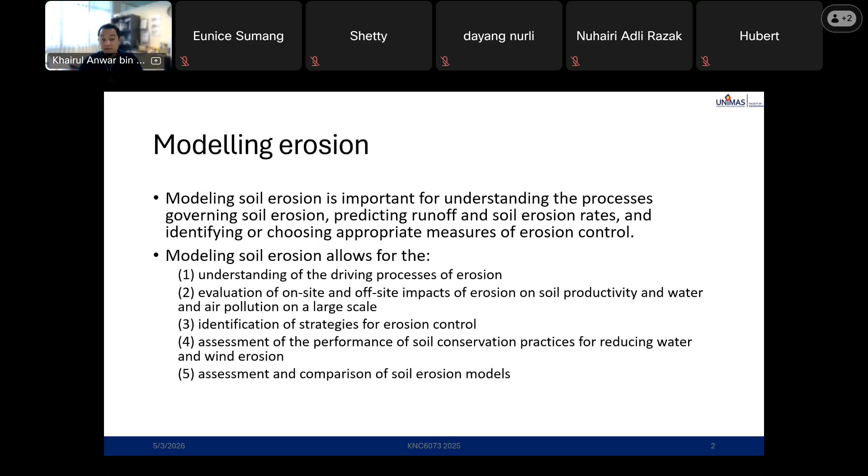As I said, there are a few models to be used. However, there's a limitation for the model as well as its benefit. So no model can completely replicate field observation. A model can, however, provide valuable information on soil erosion trends and relative differences in erosion rate among different practices, while allowing exploration and understanding of the driving processes of the soil erosion.

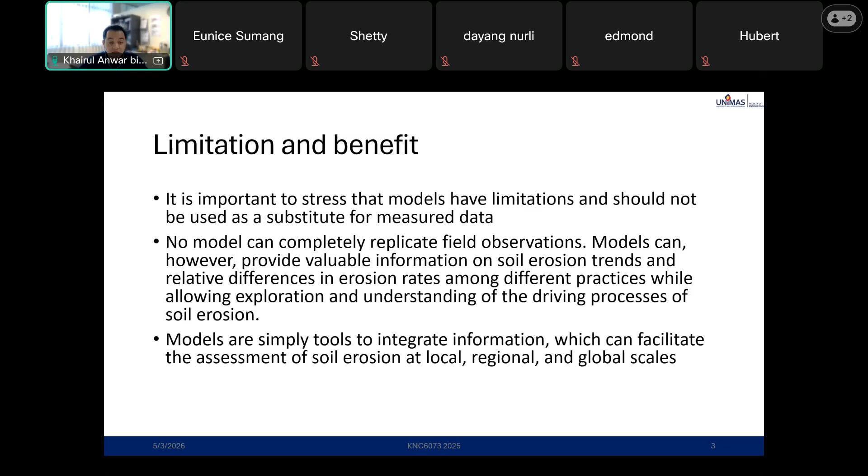Empirical model. So many empirical models have been developed since 1900. So the first one is equation 3.1, equal to C prime times L to the 0.6 times S to the 0.4.

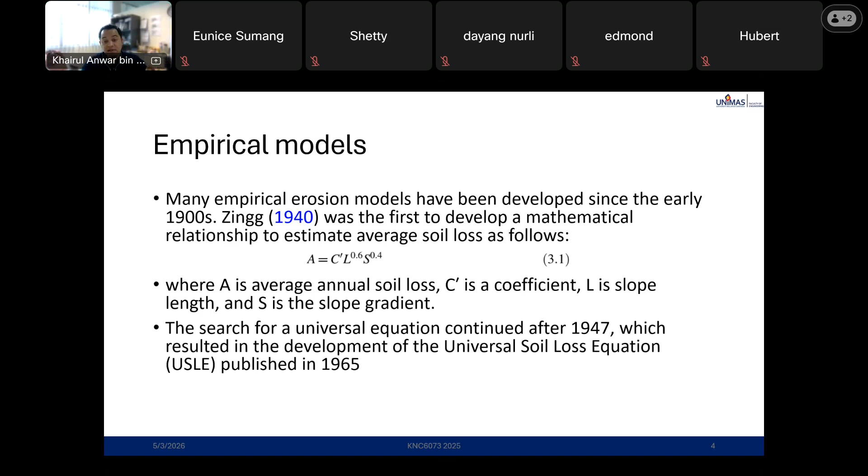Even the equation USLE 1965 has had improvements from it. We have a modified USLE, or MUSLE. We have a revised USLE, or RUSLE 1 and 2. So it's evolving.

So the average annual soil loss in USLE 1965 is equal to R times K times LS times C times P. A is the average soil loss in megagram-ton per hectare. R is rainfall and runoff erosivity index, EI, for the location of interest. Later we discuss each of these variables.

Then K is the erodibility factor, LS is the topographic factor, C is the cover and management factor, P is the support practice factor. So the early versions of USLE were exclusively solved using tables and figures. Continued improvement has resulted in the modified and revised USLE.

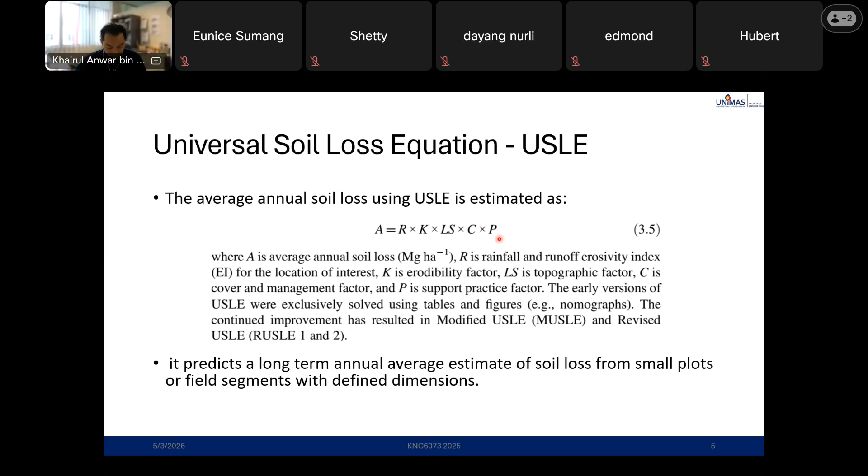So there's a limitation to USLE 1965. That's why there are some modifications and revisions to the original 1965 equation.

So USLE, unlike process-based models, cannot simulate the following: runoff, nutrient, and soil loss from watershed or field scale area; soil loss on an event or daily basis; variability of soil loss from storm to storm; interrill, rill, and stream bank erosion separately; process of concentrated flow, flow channelization, and sediment deposition; and detailed processes like detachment, transport, and deposition.

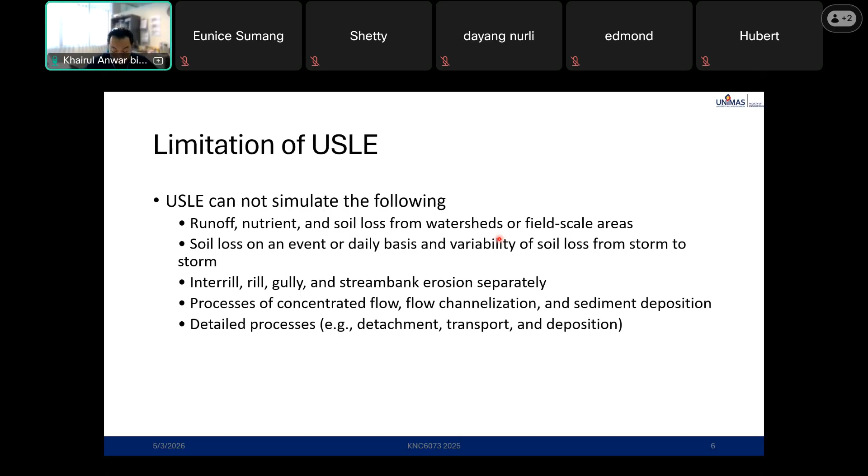So R, the first letter in the USLE, is the rainfall and runoff erosivity index.

The EI, which is the same as R in equation 3.5, is computed as the product of total storm energy times the maximum 30-minute intensity of the rain. So EI equals E multiply I, where E is D as in equation 3.7. D is the rainfall depth, I is the 30-minute rain intensity.

So USLE uses the annual EI, which is computed by adding the EI values from the individual storms that occurred during the year.

So there are some limitations for the USLE-computed EI here, in equations 3.6 and 3.7. It is only valid for rain intensity less than 63.5 millimeter per hour.

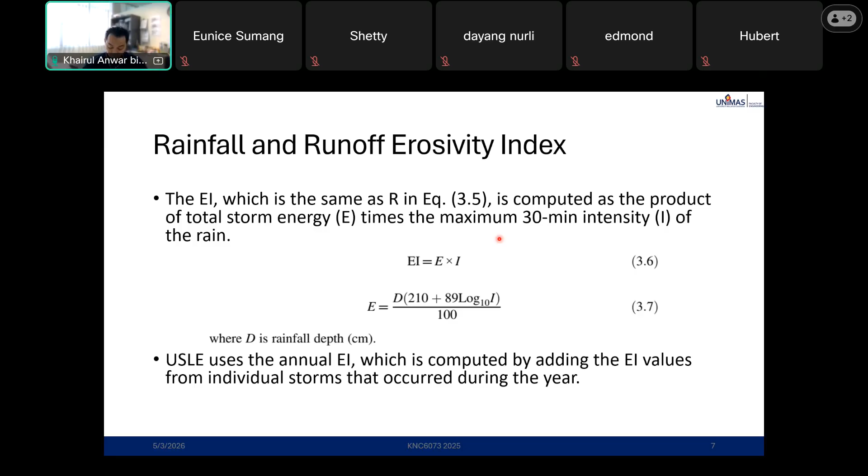So this is the map of runoff erosivity index, or R. Data on R for different locations in the continental USA, and estimates for the world, are available. In the US, about 4,000 sites were analyzed for rainfall intensity over a range of return periods to develop an isoerodent map, figure 3.1. Values of EI30 below 500 correspond to dry regions, and 500 and above correspond to humid regions.

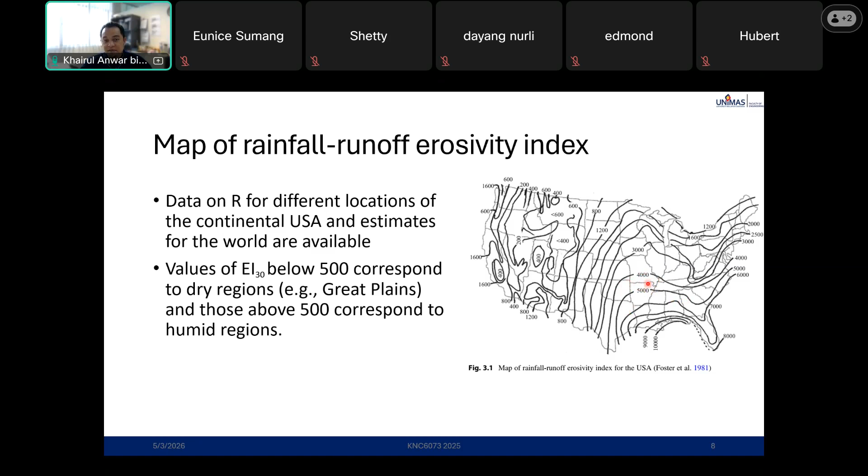So for this, how do you use this map? Let's say the location is limited to the US where the data is available. For example, if you want to identify the R index for a certain point, how much is it? Here, it's between 4,000 and 5,000, so you can estimate how much R is there. For 4,000, this is the humid region. They also have a soil erodibility factor.

So the soil erodibility factor refers to the soil's susceptibility to erosion.

So the K values for the development of USLE were obtained by direct measurement of soil erosion from fallow and row crop plots across a number of sites in the USA, primarily under simulated rainfall.

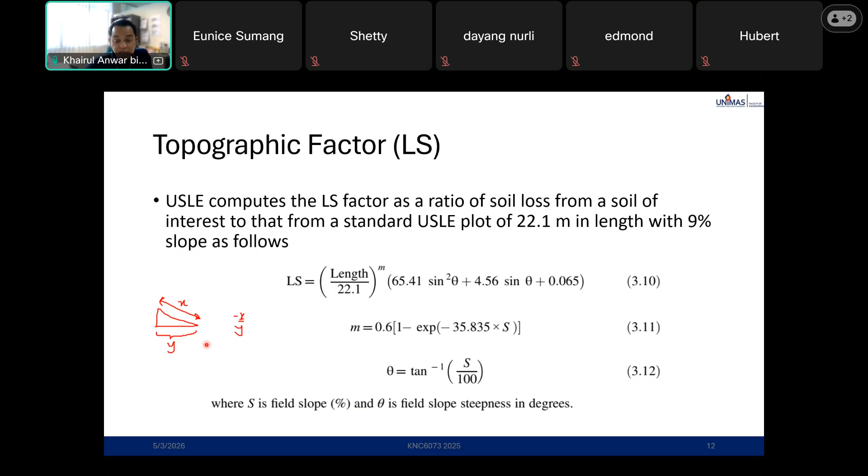How does the steepness calculate? It's based on the length of y and x. When it's downhill, down slope, x is negative. Later there will be an example.

Cover management factor, this depends on table 3.1. The C factor is based on the concept that soil loss changes in response to the vegetative cover, crop cover during the first stage period, rough fallow, seedling establishment, growing, maturing crop, and residue or stubble. It's computed as the soil loss ratio on a field under a given crop stage. The C factor varies with subfactors such as canopy cover and amount of residue left on the surface.

This is table 3.1. You need to remember the USLE equation has a few indexes: R, K, LS, and C. How to use it depends on the description of the land or soil. Let's say the soil is for corn plantation.

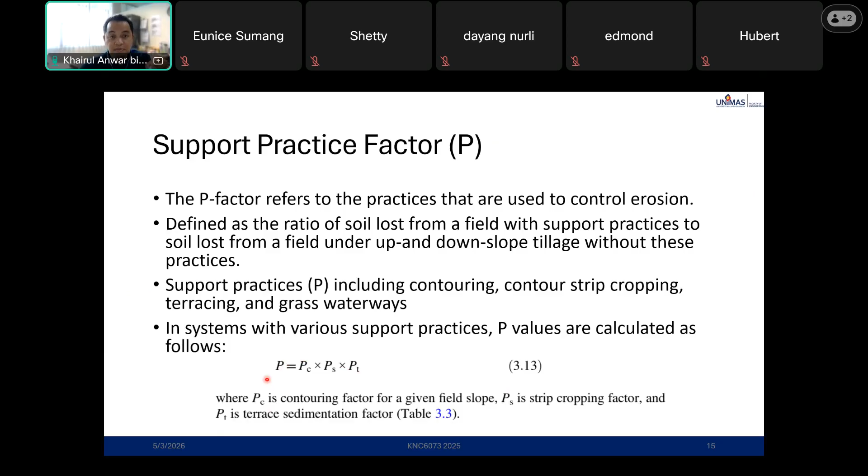In systems with various support practices, P values are calculated as follows in equation 3.13, where PC is the contouring factor for a given field slope, PS is the strip cropping factor, and PT is the terrace sedimentation factor. This is in table 3.2 and 3.3. You need to identify PC, PS, and PT, and put them together to get the value for P, the support practice factor.

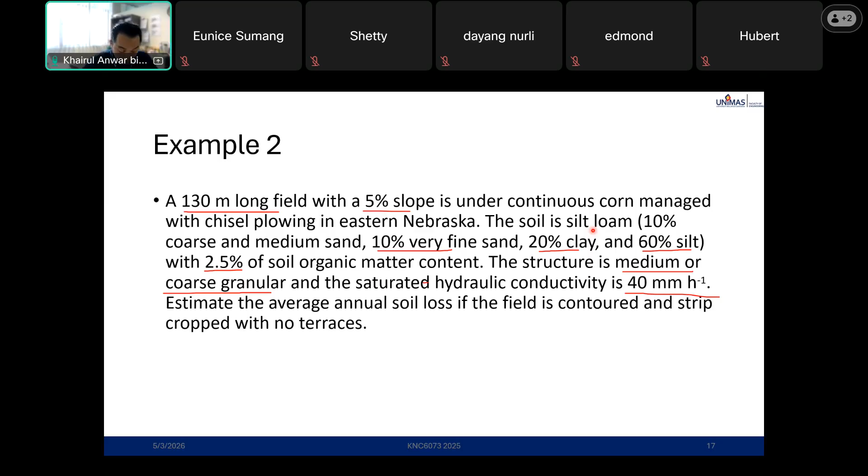R is 2,500. Next is the value of K. K depends on equation 3.8, where there's a value for A, B, C, and M based on the description given in the question.

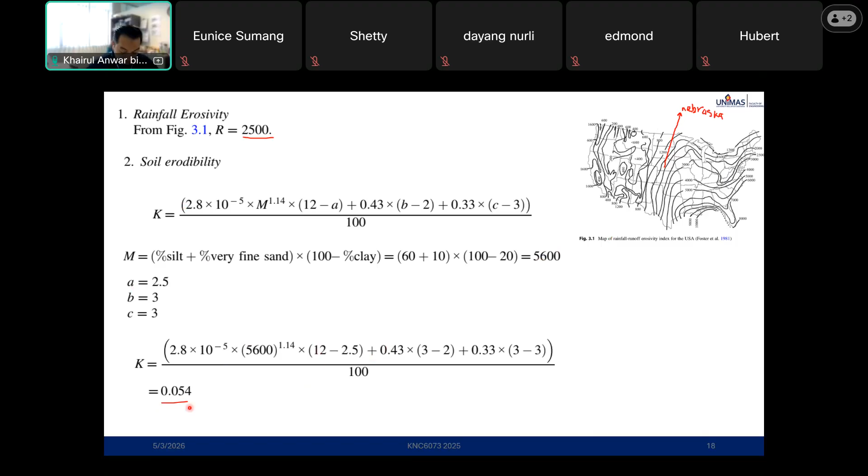Next is topographic, so LS.

So for topographic factor, S is the percentage of slope. In this case, slope is 5%. So 5 divided by 100 is 0.05.

Then we have theta. We need to determine S, then we can get theta. So once you get M and theta, you just plug them into the equation.

3.10. So the length is given in the question, which is 130 meter long slope. So this is 130 meters to the power of M. M here is 0.499. Then since theta, plug in, we will get LS equal to 1.106.

Next is the C value, the cover management factor. For value of C, you need to refer to table 3.1, page 59. Based on the description, this is a continuous corn managed with chisel plowing. So the value of C is 0.2.

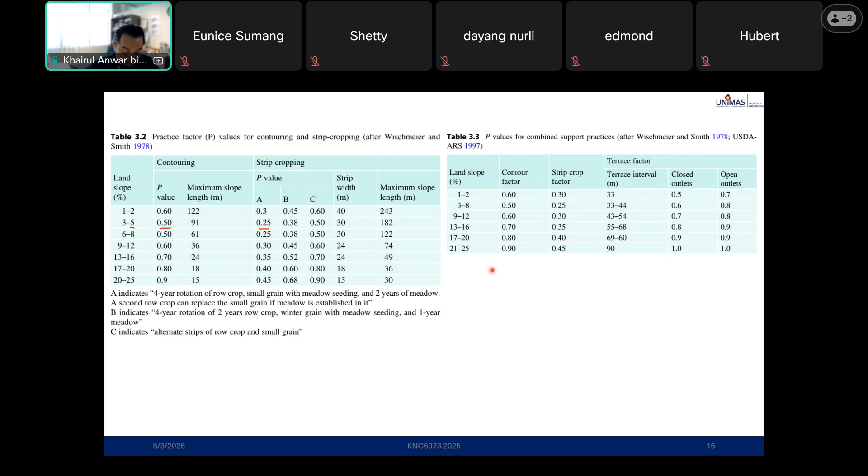And for PT, oh, there's no terrace. So with no terrace, P is not equal to 0, it's equal to 1; equal to 0 means P equal to 0. So PC is 0.5, PS is 0.25, PT is 1, because there's no terrace. Once you determine all the factors or values for the unknown variables, then we can calculate the value of A.

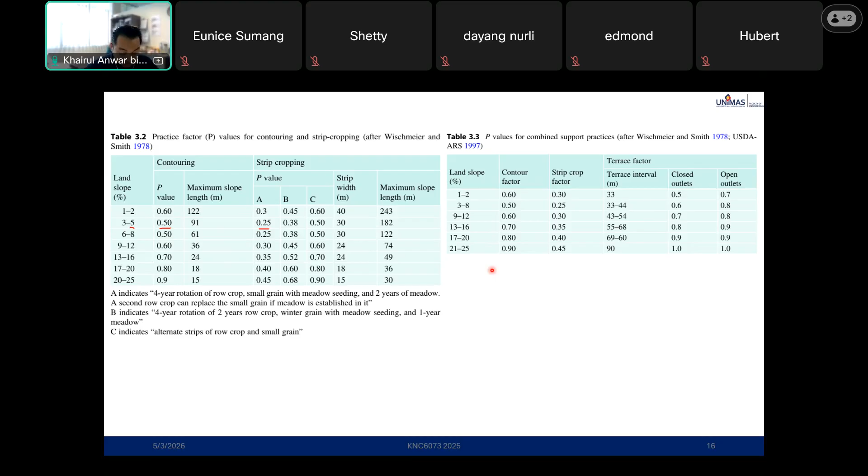Then once you determine all the index factors or values for the unknown variables, we can calculate the value of A. In this case, A is equal to 3.73.

Another question: estimate the soil loss if the crop field had been managed without contouring and strip cropping. So under this new condition, the P value would be equal to 1.

So what is A equal to? Estimate the soil loss if the crop field had been managed without contouring and strip cropping. So meaning, no terrace, no contouring, no strip cropping. So all PC, PT, PS are equal to 1. That's why P is equal to 1.

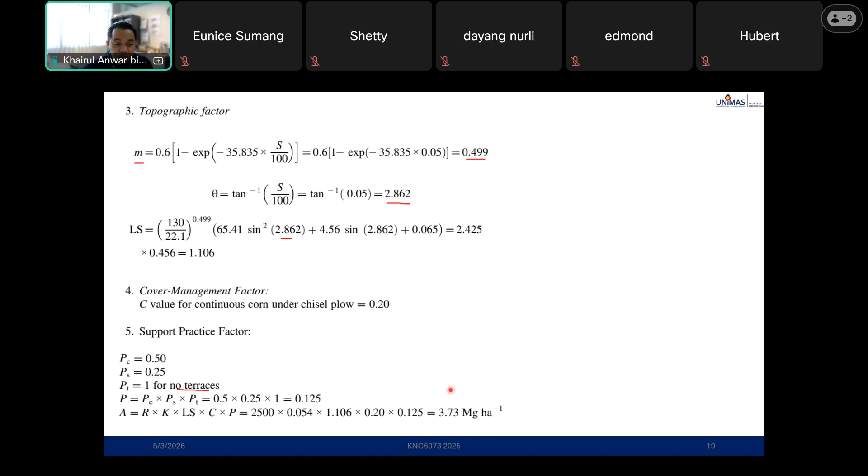So the soil loss is a lot, like a lot. With the support factor, you might lose 3 tons per hectare per year. This is annual soil loss. Then without the support factor, the loss is 29 tons per hectare per year. That one is a lot.

So this is the model. From the modeling, we can see this area, we can do the calculation and estimate how much soil will be lost in a year. So if we put support to this area, like contouring or terracing, we can reduce this soil loss up to this level. That is why we do the modeling.

Modified USLE. The MUSLE is a modified form of USLE. While USLE predicts sediment yield or soil loss based on rainfall, MUSLE predicts it by using the runoff factor, which accounts for the antecedent soil water content.

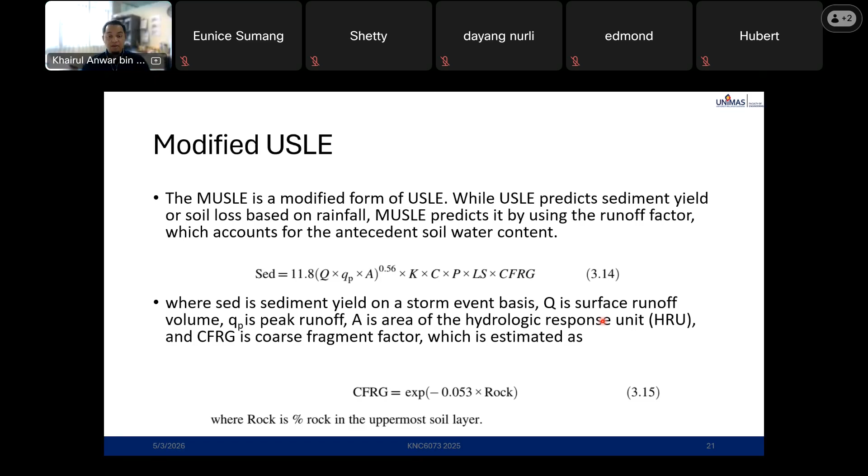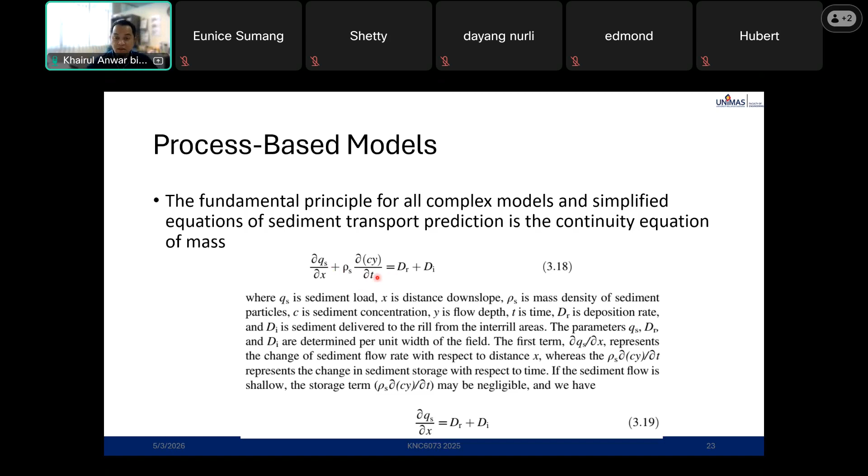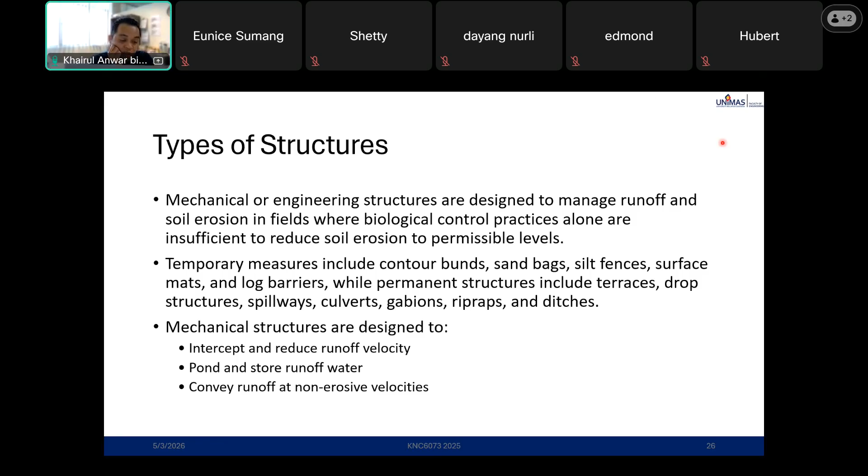So mechanical structures are designed for many purposes, meaning it's important. Some are to intercept and reduce runoff velocity, pond and store runoff water, and convey runoff at non-erosive velocity below. Contour bunding consists of establishing earth or stone embankments 1 to 2 meters wide on the field contour to reduce the runoff velocity.

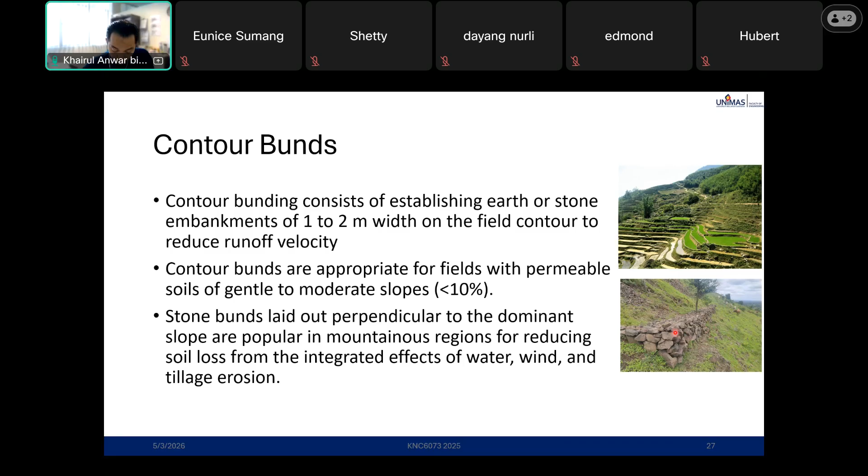All of the examples indicate that if we put some support factor on the slope, it will reduce the amount of soil loss.

Then silt fence - a barrier consisting of woven and non-woven geotextile fabric product anchored to vertical metal or wooden posts, which are arranged on the contour across the slope for reducing runoff velocity and filtering sediments.

It's like this - this is the silt fence. But silt fence is considered a temporary measure, unlike the permanent structure like this contour bund.

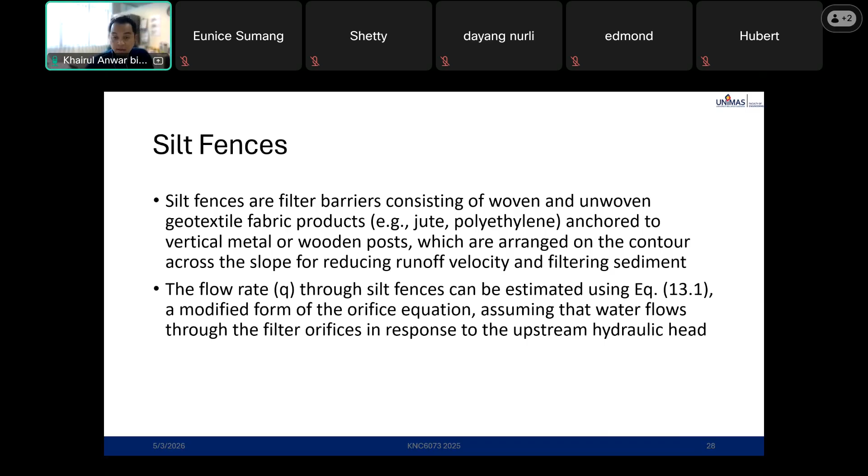So for some calculation, the flow rate through the silt fence can be estimated by equation 13.1 or 13.2, where C is the coefficient of discharge. When you see this word coefficient, it most likely means it's an empirical model. A is the area of the orifice.

g is the acceleration due to gravity, h is the depth of ponded water upslope of the fence, m is the number of openings, and dl is the opening size in the horizontal direction.

So there's an expression here - this symbol equals equation 13 point something. What is i? Without... n is the total number of openings occurring in the vertical direction. So i equals 1. How many number of openings? That is n.

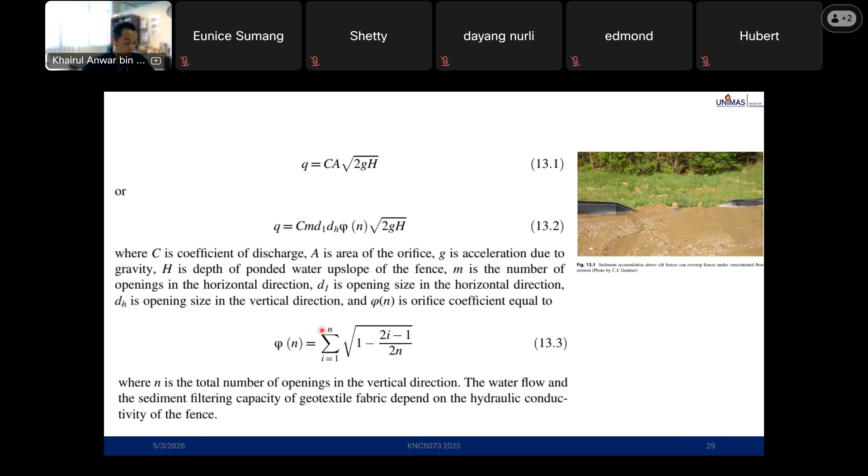Agriculture uses more than 70% of the world's freshwater for irrigation, which is true. However, availability of freshwater is declining due to intensive agriculture, increase in urbanization, and other uses of water resources. Farm ponds are structures designed to harvest water while controlling water erosion and flood.

There are four types of ponds: groundwater fed pond, stream or spring fed pond, upstream pond fed with diverted water, and rain-fed pond.

The groundwater fed pond, also called the dugout pond, relies on a shallow water table and is constructed in low-lying areas with slope less than 5%, where the prevailing water table is near the soil surface, about 1 meter. These ponds are relatively inexpensive to build. Collecting groundwater in a pond may also help lower the water table in poorly drained soil.

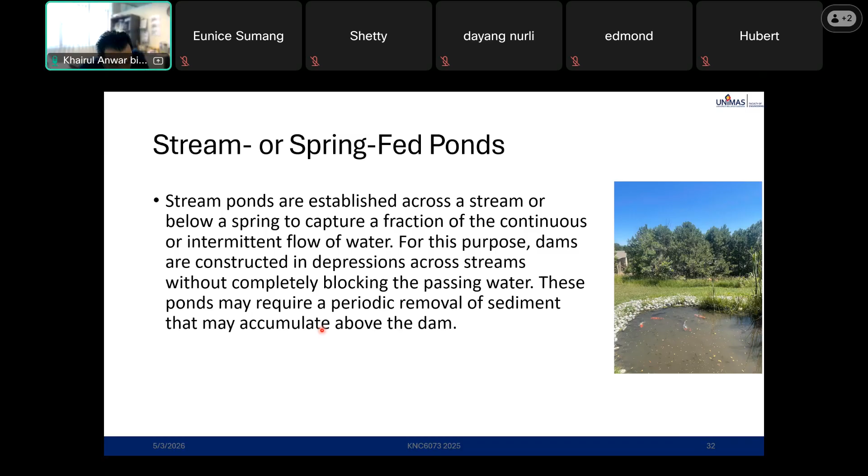Then we have upstream pond and rain-fed pond. Rain-fed pond is the most common type of pond in water-limited regions. The source of water for a rain-fed pond is surface runoff.

These ponds are installed later. There's a design on how to design a pond - how big the pond needs to be to get a certain amount of usage.

Design and installation of pond: proper design of a pond is important to reduce runoff, store water, reduce water losses to seepage and overflow, and allow water availability for growth. A suitable site should be selected based on rainfall pattern, soil hydrology, land use, and topographic features.

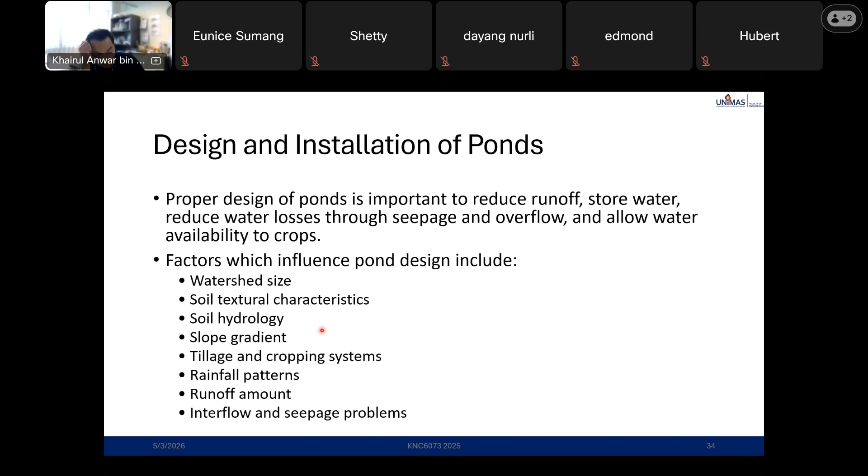Water seepage is a major source of water loss from a pond. Compaction, water seepage means it seeps into the soil itself. So compaction and lining with impermeable materials such as clay or plastic sheeting are the strategies to reduce seepage in small ponds.

The volume of runoff available for harvesting can be calculated using equation 2.19, already discussed under water erosion, which is S equal to 25,400 over CN minus 254.

The pond depth is a function of evapotranspiration rate, cost of construction, safety, slope gradient, and land availability. For instance, a shallower pond about 1 meter deep may lose significant water through evaporation but is relatively less expensive. The depth of the pond, the drainage or watershed area (WA) required per pond, and the number of ponds for collecting about 1,000 cubic meters are estimated using equation 13.4.

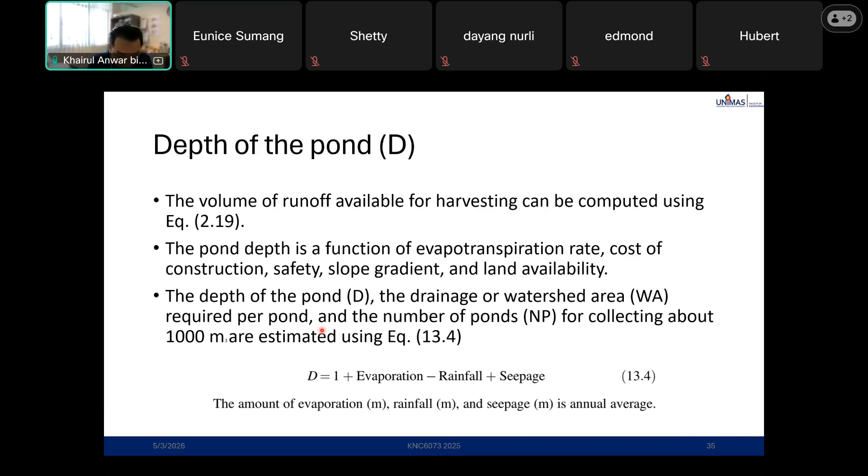D equal to 1 plus evaporation minus rainfall plus seepage. So D is the depth of the pond. D is set to 1 when D is negative. The desired D can be used to adjust the watershed area WA.

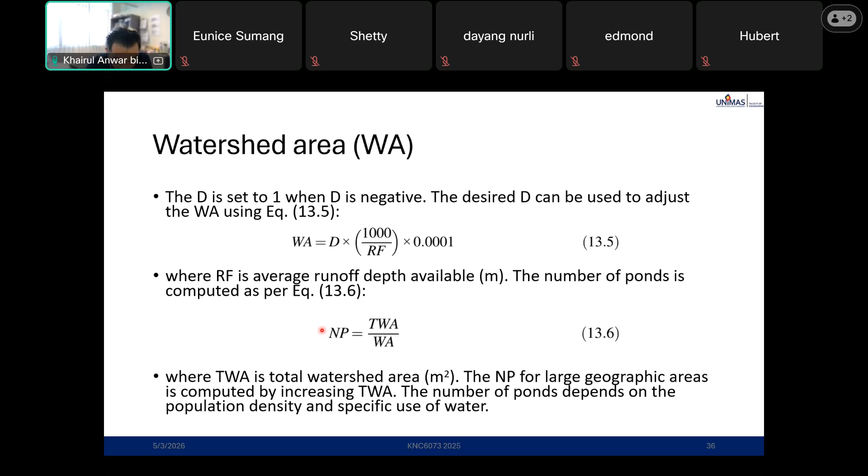Using equation 13.5, where RF is the average runoff depth available. The number of ponds is computed based on equation 13.6. NP refers to number of ponds, so NP equals TWA divided by WA, where TWA is the total watershed area.

Example: design a pond to supply water to 50 milk cows, 100 sheep, 0.5 hectares of vegetable under drip irrigation, and a family size of 5 in an arid region. So what is arid? It's a dry region.

Assume that losses of water in the pond by evaporation and seepage are about 50%. This is a lot. The average annual precipitation is 500 millimeters and the runoff curve number is 70. Runoff curve number, that is the CN value. To calculate runoff S, we need the CN, so we go back to chapter 2 or 3. In chapter 2, on erosion, there's a table to determine the value of CN.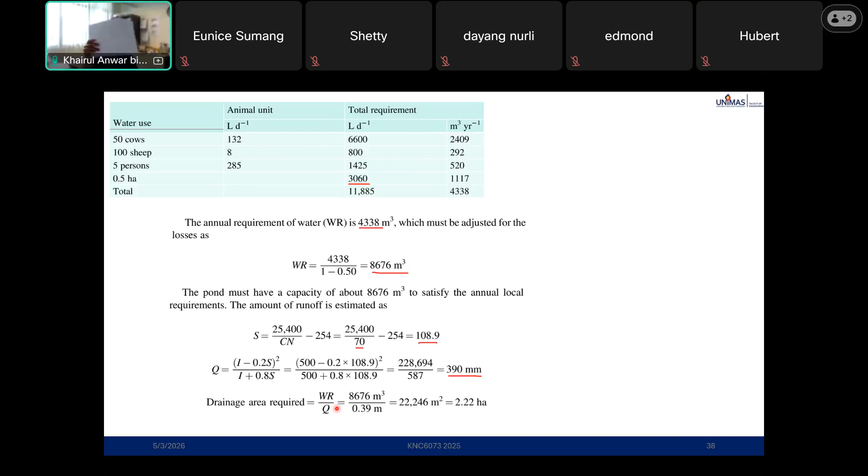Next is terraces. Terraces are earthen embankments established across the dominant slope, partitioning the field into uniform and parallel segments for controlling soil erosion.

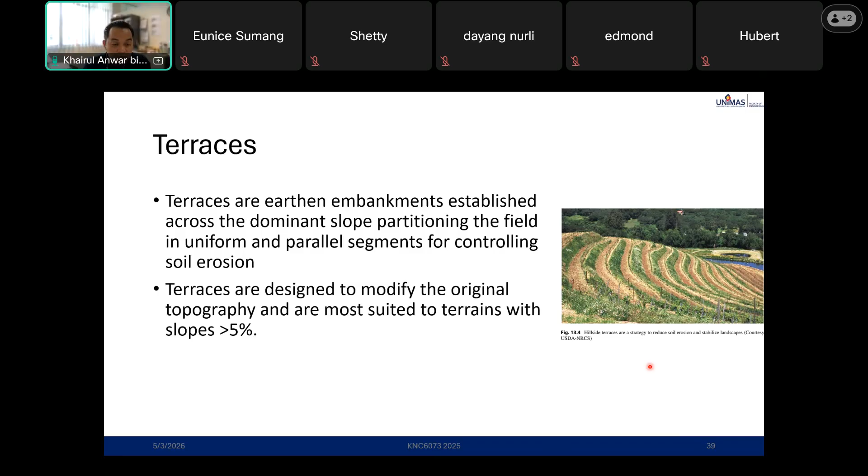So terracing decreases the LS and P value of the USLE. LS is the topographic value. P is the support practice factor and provides the greatest benefit to soil and water conservation when used in conjunction with the proper cropping and tillage system, and soil conservation structures such as grass waterways.

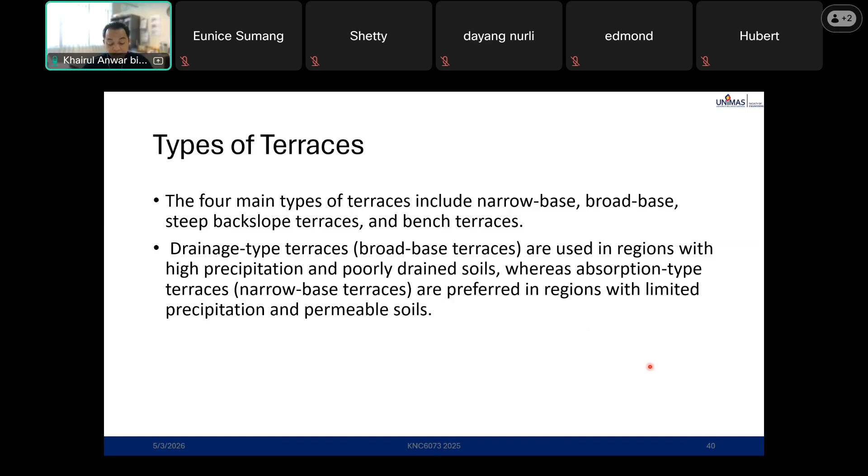The narrow base terraces are preferred in regions with limited precipitation and permeable soil. This is a narrow base terrace. These terraces are used in shallow and sloping land, unlike broad base terraces, and have a steep, narrow ridge, figure 13.5. Both the front slope and the back slope of the narrow base terraces are planted with perennial grasses. The ridge in narrow base terraces is steeper than that in broad base terraces.

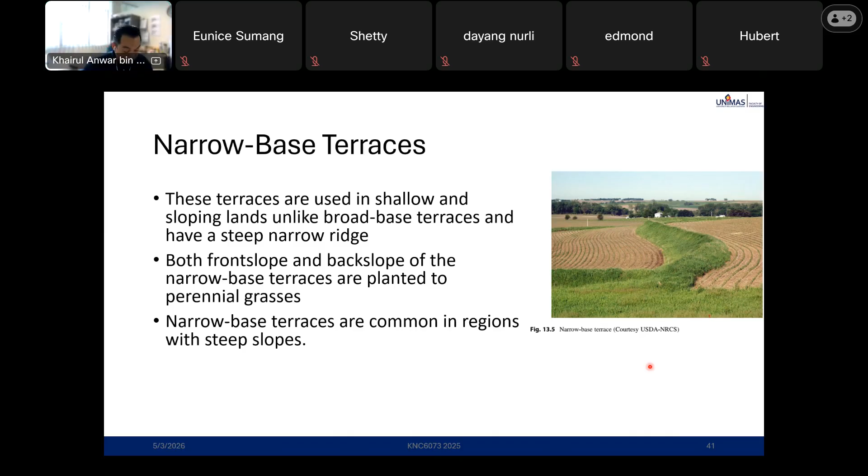So this is the broad base terraces. Broad base terraces are used in long and uniform fields with slope less than 8%. All sections of the terraces are farmed, unlike narrow base terraces. They are also known as channel terraces because the channels are all cultivated.

The channels are graded to an outlet for runoff disposal; appropriate engineering for erosion control and drainage are important.

So this is the broad base terraces: front slope, back slope, original slope. They dig it out and place the soil on top here. So this is what we call front slope, back slope, and this is the cut slope.

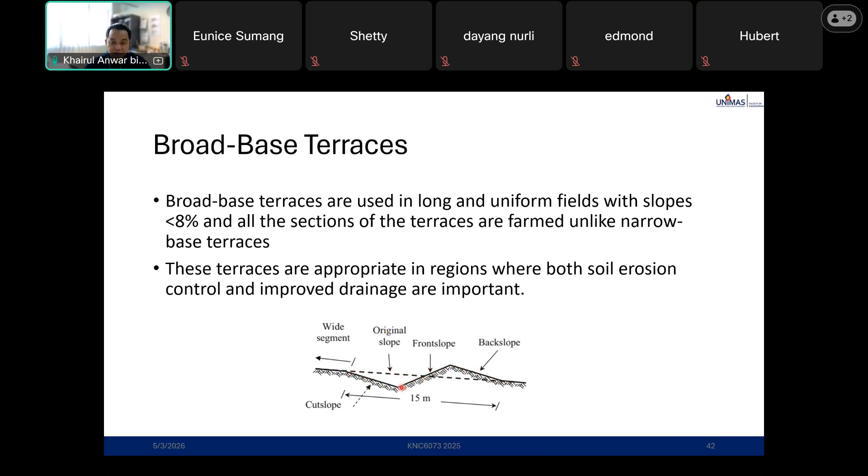Bench terraces are widely used in hilly terrain worldwide. Bench terraces are suited to fields with slope more than 10%, and often have a steep back slope.

The width of the bench and height of step are variable depending on the field slope. Refer to figure 13.7: a width of 7.5 meters is used in moderately sloping land. The bench width of the terraces becomes narrower with an increase in slope gradient and length.

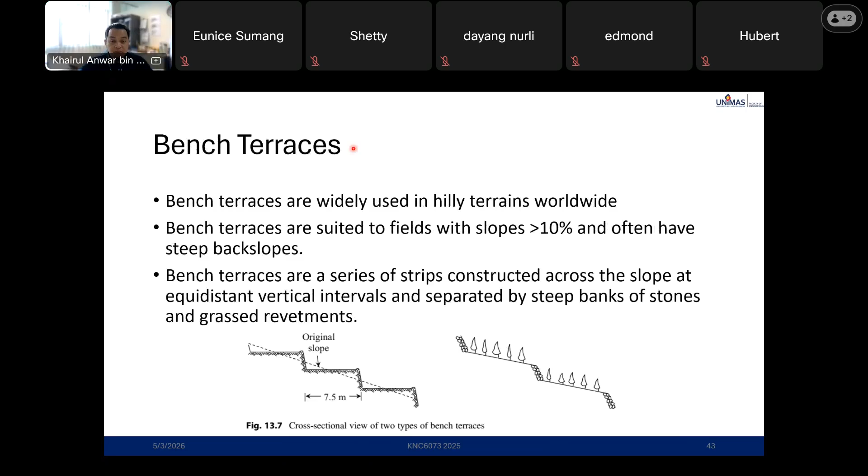So, design of the terraces: terraces should be designed to contain runoff for a rainfall event with a return period of at least 10 years, and should consider soil slope gradient, risk of within-terrace erosion, soil properties, field equipment width, and cropping system. Terraces must be properly designed to reduce interference with machinery traffic, cropping system, and field management. They should have proper ridge height and well-designed outlet channels to convey water and reduce risk of overtopping.

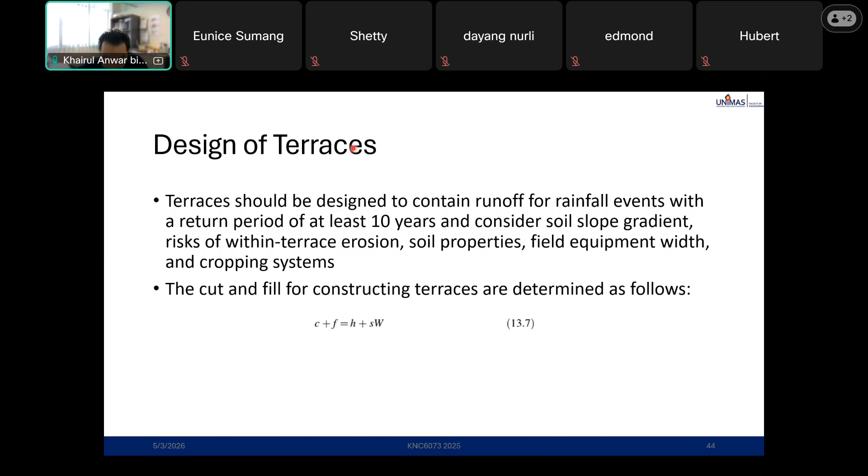So terrace height equals channel depth plus freeboard, equation 13.5. What's this freeboard?

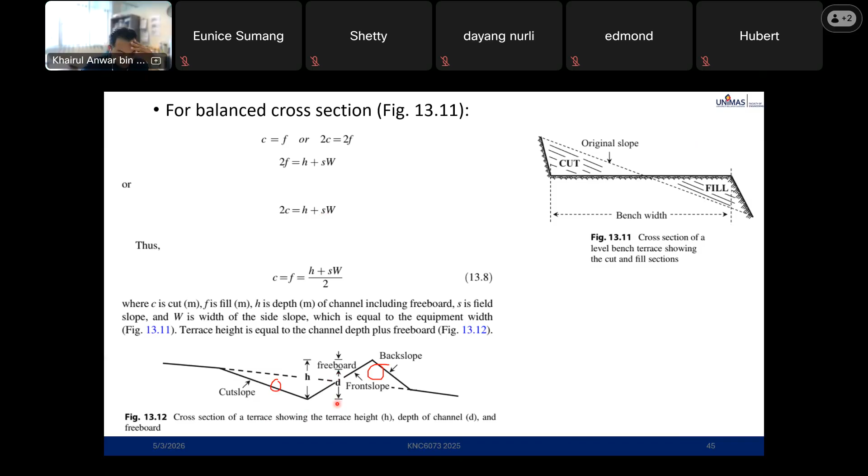So another method — this is one method, this is another method used in the US. Most terraces are designed based on the following relationship: Vi equals X multiplied by S plus Y, equation 13.9, where X is based on the geographical location — this is what we call a model graph. S is soil slope, Y is the soil condition.

So Vi is the difference in height between two adjacent or succeeding terraces. Hi is the actual horizontal distance between the terraces, not the distance measured over the land surface. The number of terraces in a long field is determined by dividing the width of the field by Hi.

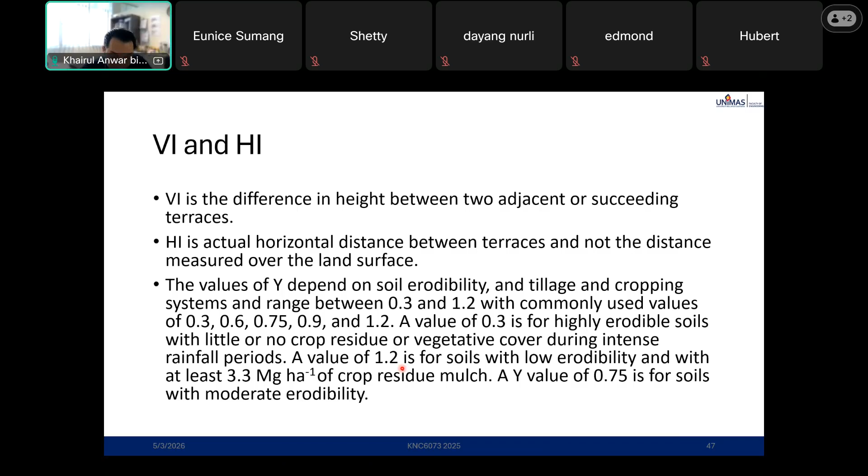The value of Y depends on soil erodibility, tillage, and cropping system, and ranges between 0.3 to 1.2, with a commonly used value referred to on page 315. A value of 0.3 is for highly erodible soil. A value of 1.2 is for soil with low erodibility and with at least 3.3 tons per hectare of crop residue mulch. The Y value of 0.75 is for soil with moderate erodibility. For example, number 5.

So compute the terrace spacing for a soil with moderate erodibility and 3% slope, y equal to 0.75, in Minnesota. Determine the even multiple of turn between the terrace if the width of the field equipment is 7.5 meters.

So from figure 13.13, x is equal to 0.24. This is for Minnesota, so Minnesota is clearly near to x equal to 0.24.

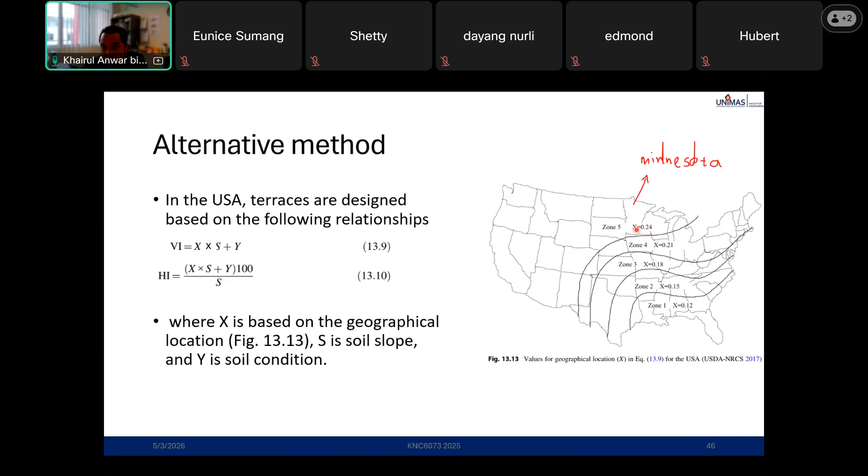Vi is 0.24 times 3, which is the slope, plus 0.75, which is the y. So Vi is 1.47 meters. Hi, same value, different equation.

The Hi must allow an even turn of field machinery. So 49 meters divided by 7.5 is 6.53 turns. How to calculate for the 0.53? So Hi should be adjusted to 45, divided by 7.5 meters, which is the field equipment width. So we need a 6 turn so that the field equipment could make an even turn of 6 between terraces.

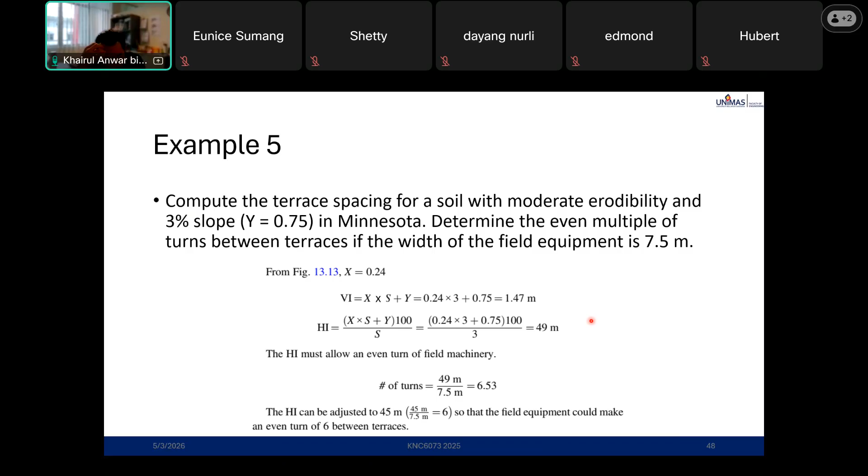Next, example 13.3: compute the cut and fill and front and back side slope to construct a terrace on a sloping field, 5% slope. With a balanced cross section, the terrace width is 8 meters and the channel flow depth is 0.5 meter. The freeboard is 0.15 meter.

So the terrace height h equal to d plus freeboard: 0.5 plus 0.15 is the terrace height, 0.65 meter.

The required depth of cut and fill: C equal to F, this is equation 13.8. So 0.65, S is 0.05 which is the slope, W is 8 meters, divide by 2. So C and F, cut and fill, should have a similar value of 0.525 meter.

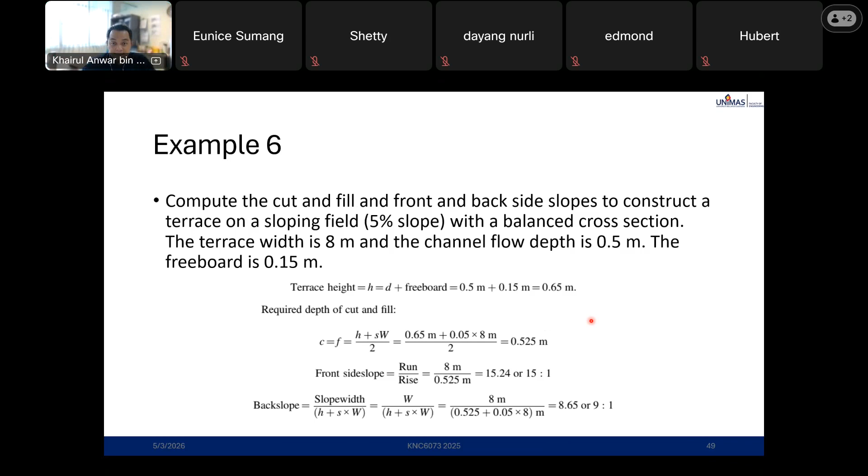Gully erosion control. The erosion control is on page 318. So, type of gully erosion control structure: gully erosion control is divided into two, temporary and permanent structures, depending on the severity of the erosion.

For temporary structure, this includes a small dam of branches or stone constructed across the gullies. You know gullies were referred to last week. How does a gully look? How to control a gully? Temporarily you put stone inside. For a permanent structure, you concrete to create and build a concrete channel, or farm pond, or concrete dam to minimize the gully erosion.

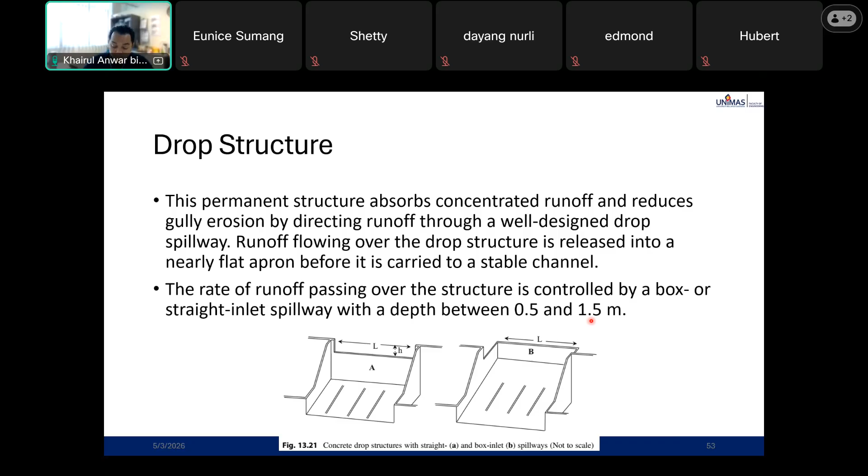So the flow through the spillway is calculated using equation 13.13. Q is the maximum discharge, C is the spillway coefficient, L is the spillway length, H is the depth of spillway. C equal to 3 is used for rock, 1.8 is for gabion section.

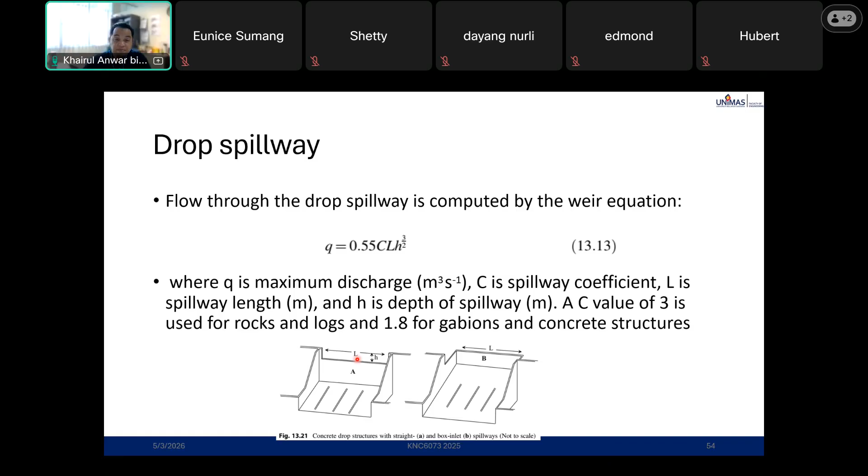Example 13.5: Design a box-inlet drop spillway for a check dam to control gully erosion from a watershed with an area of 20 hectares. The dam will be constructed from gabion baskets. The average 20-minute rainfall intensity I, for a return period of 20 years for the region, is 75 millimeters per hour, where an average of 70% of rain becomes runoff.

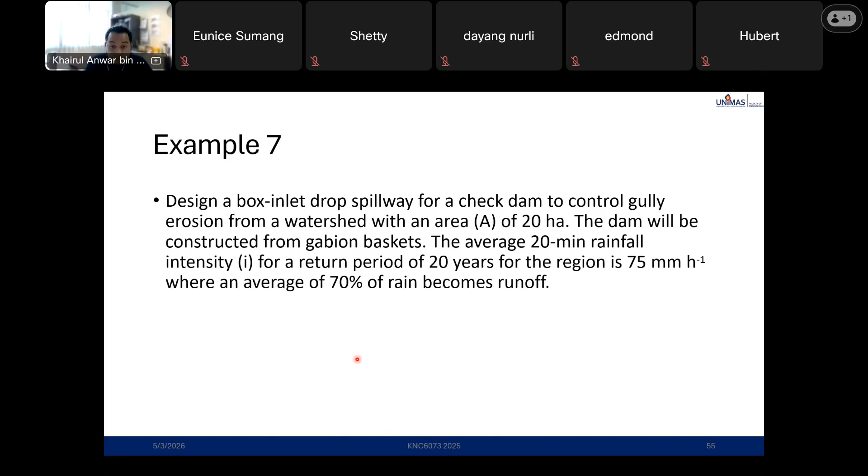So using equation 2.21, refer to chapter 2, first compute the peak runoff rate Q. A is 20 hectares, or 0.2 kilometer square. Q is C times I times A divided by 3.6. C is 70%, I is the rainfall intensity, which is 75 millimeters per hour. Then A is the area of course 0.2, and Q, the peak runoff, is 2.92 meter cube per second.

If the coefficient for concrete structure is 1.8, the dimensions of the spillway are calculated using equation 13.13. So once we identify Q from equation 2.21, we can compute L based on 13.13, with C equal to 1.8 for concrete structure, as described in 13.13. Now we need to find L.

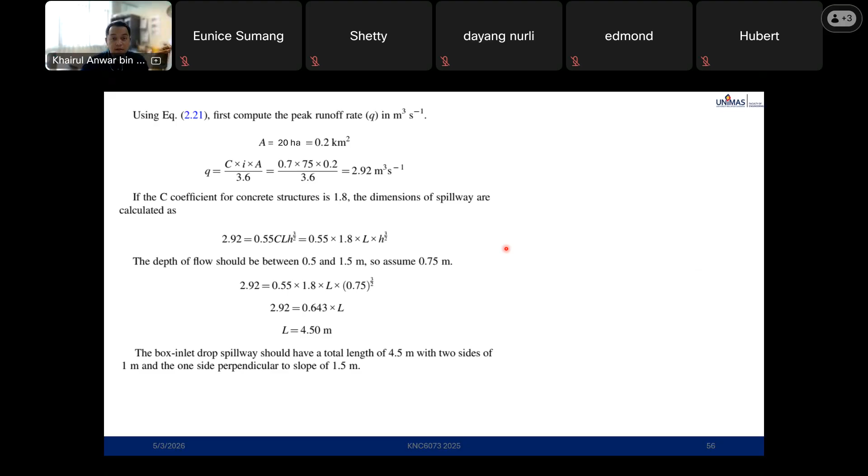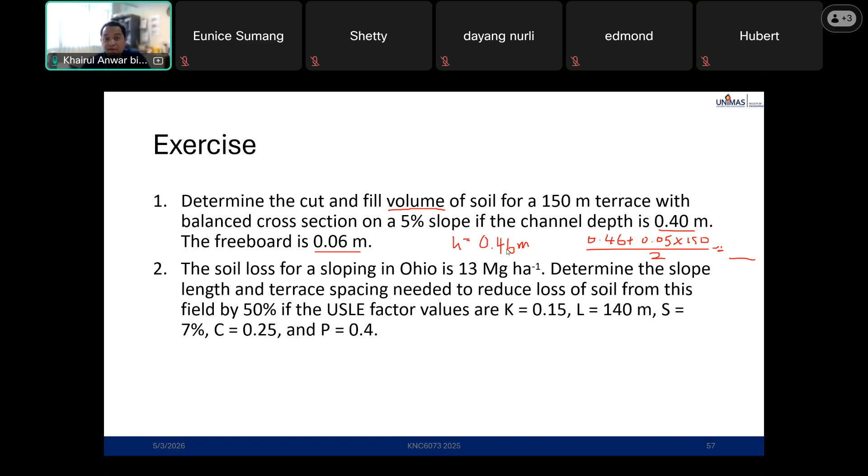Doctor, can I know what should we focus for the final exam? For example, like, do we have to focus more on soil pollution or maybe noise pollution?